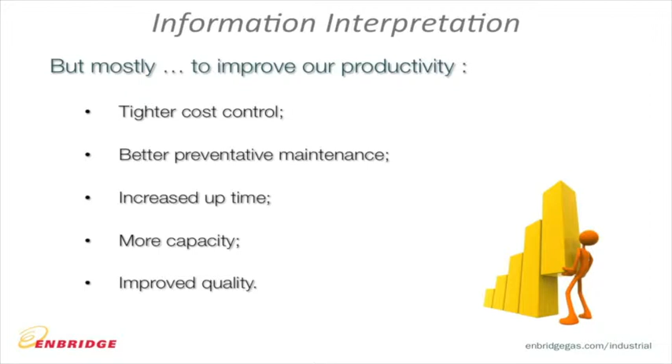But mostly what it comes down to, unfortunately, in our industrial environment, it's about good old boring improving the productivity stuff. Tighter cost controls, better preventative maintenance, increased uptime, more capacity, and ultimately improved quality.

All of those, tighter cost control, I don't have to explain to you. If you can know for your product mix how much each of those products actually uses in energy, you can price it better rather than just saying, I have this much cost over the month, I make this many widgets, I just divide them up.

Better preventative maintenance. If you have a system that tracks the gas usage or electricity usage or water usage and all of a sudden it starts climbing out of your expected range, it's time to clean that heat exchanger. You don't have to wait until something blows up and you have downtime that you didn't expect. Increased uptime, a result of those two together. More capacity. Now you don't have unexpected downtime, so you have more capacity. You can make more widgets within the same time frame.

And improved quality. I used to work in a facility where we had 12 annealing and high heat furnaces for steel. And I can tell you that I didn't care how much energy I used. It didn't matter to me as long as I made the product. But I did care if my set point started to drift off 900 and something degrees Celsius. I wanted to know that. Well, drift in the set point temperature equals drift in energy used. So if you can measure one of those, you will get better control. You will have tighter control.

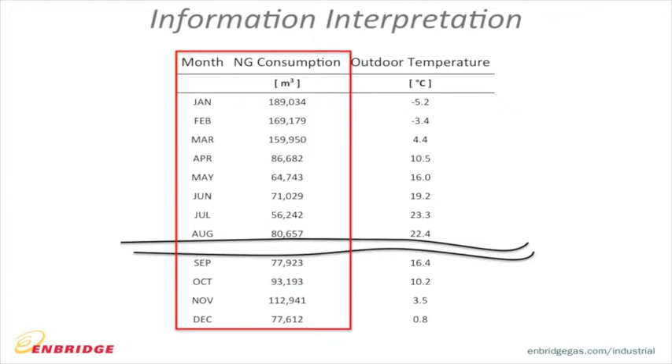Look, some examples. These are very simple examples. I just put the months. I usually look at the 3-year history, cubic meters per month, and the outdoor temperature to start with, just to give us an idea how data can be interpreted in a very simple way. So if I just take month and natural gas consumption, I get something like this. Okay. So now I know how much gas I used over the last 3 years. I know when it peaks, and if I'm really looking at it, I can say that it peaks in the wintertime, it goes down in the summertime, it's all good. Nothing special. But now I have the record of it.

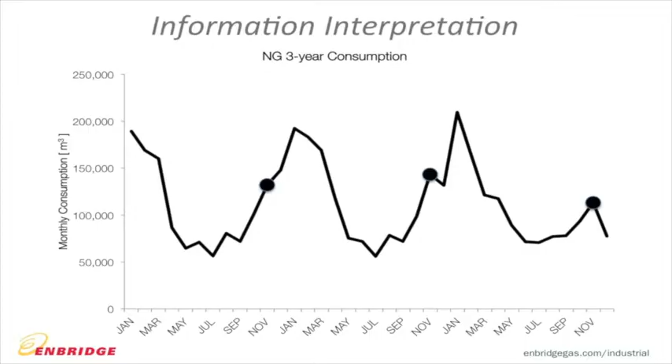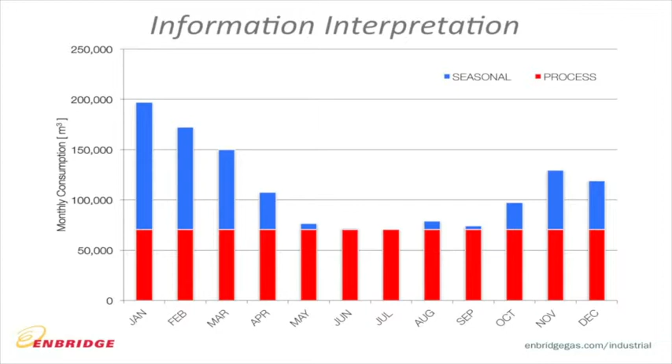A much better piece of information then is this kind of information. I take the same data, I average it over 3 years, and whatever I get in the summer usage is my process. It means it's being used no matter what the temperature outside is, which means that's my process-related usage. So that's the red one. The leftover for each individual month on top of it in blue is then seasonal usage. It means it's affected by the outdoor temperature. Mind you that usually it's space heating and ventilation, but it can be process-related as well. But it's seasonally driven. It's driven by change in outdoor temperature. So this is a much better way of looking at the data than just 3-year consumption.

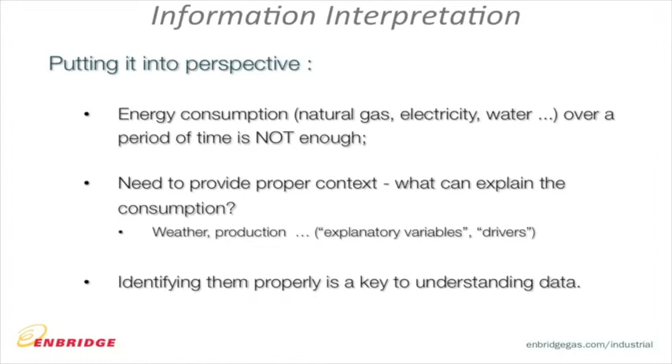So what that is teaching us is that we have to put energy consumption into perspective and into context. Energy consumption on its own won't do anything for us. You have to put it in the context of outdoor temperature, your production levels. What is it that explains that energy usage? Or are you just using energy for no particular reason? Right? There is a reason why you need energy. So you want to explain that. You have to put these explanatory variables, energy drivers, in the context of energy. And identifying those properly is the key to your data understanding. Because then you will know what you need to control your energy.

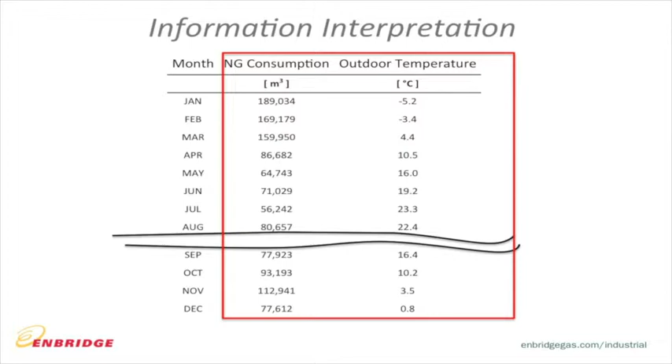So let's look at it the other way around. Let's just say natural gas consumption versus outdoor temperature now, rather than just time series. Let's just look at scatterplot data, two variables: monthly consumption on the y-axis, outdoor temperature on the x-axis. So I'm looking at this, I'm like, wow, there seems to be a break in usage.

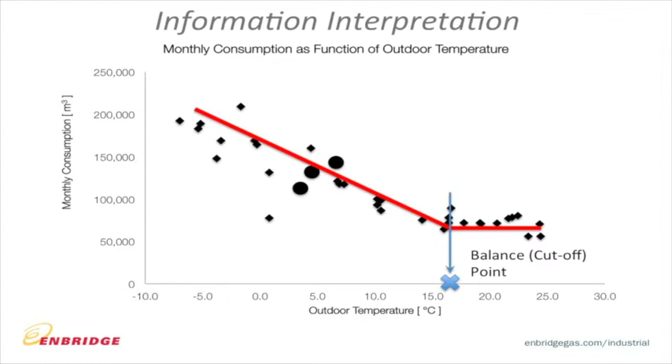And that corresponds to approximately 16 degrees. So you look at your heating and ventilation setups, and you're asking your maintenance guys, what's the setting? They will tell you, oh, it's at 21 degrees Celsius, 25, 22 degrees Celsius. Well, in reality, once it reaches 16 degrees Celsius outdoor, you don't use any heat. The unit might be on, but your heater doesn't come on.

So now this data all of a sudden becomes useful to you, because past 16 degrees, there's no variability with temperature anymore. Now you can get a feel for, oh, let me see what else we can do about it. Again, put energy into perspective. Put it in the context of what drives the energy usage.

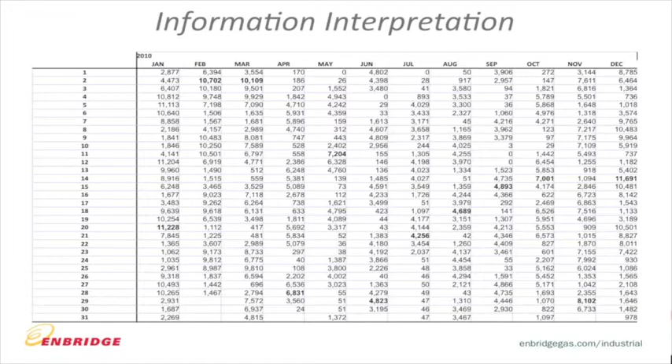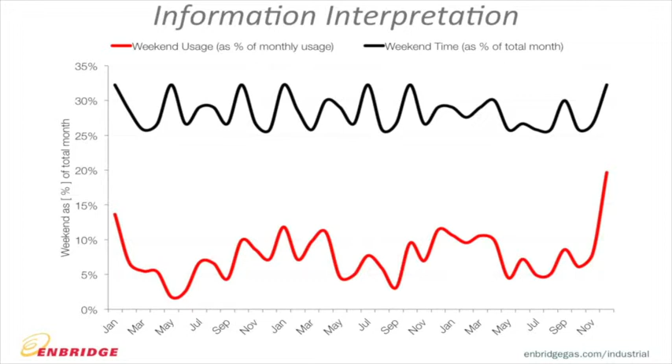Another way of looking at the data is do it day by day for all the months. Again, I usually like to do a 3-year period. I overlay the weekends on top of it. Our ESCs have the spreadsheet. We can look at your data on your request. Why would I look at that? This is my energy usage through the weekends over the 3-year period. This is how many weekends and off days we had in those 3 years.

So now all of a sudden, if I'm a 24/7 operation, I expect this line to be close to that one. I'm expecting to use the same amount of energy on the weekends. But if I'm running this 16/5, and my energy here is up there, somebody's not turning equipment off. How much cheaper does it get? Turn the equipment off and get the savings.

Not only that, you can quantify it. You can say how much energy you used, how much you should be using, subtract it. You have the business case and justification. Why would you turn this equipment off? That's how you should look at the data. Forget just the time series. Time series on its own won't do anything for you. Put it into perspective on energy drivers.

So now we'll do a brief hands-on example again of how we collect the data, just to give you an idea of what this system here can build. What we will do is we will have a little blower. It's going to generate the flow, and the meter is going to log the data that it generates. So you can have a bit of a feel of how the system actually works. Again, this is not a be-all end-all system. It's a very simple system that Jeff built for us here. But it can be applied and multiplied in the facility all you want.

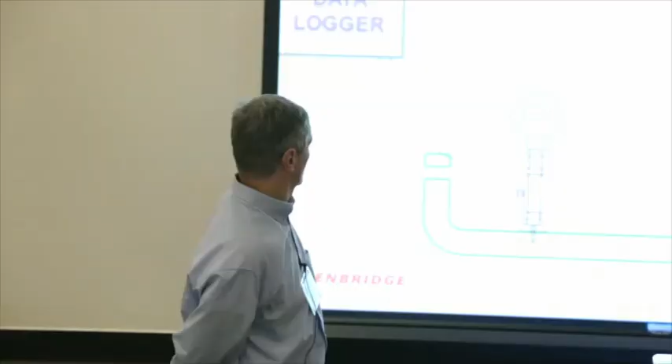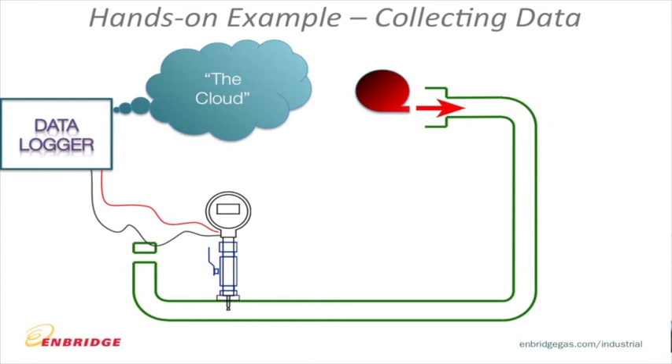So to recap, you can have a meter with a little lollipop on top, so you don't have to have a separate box. That meter will output a 4 to 20 milliamp signal to the data logger that Jeff had on the laptop there. And that can be accessed from any laptop that has Internet Explorer or Chrome or anything like that running. So there is no additional software that you need. And then, of course, everybody puts stuff in the cloud today. You can do the same thing there.

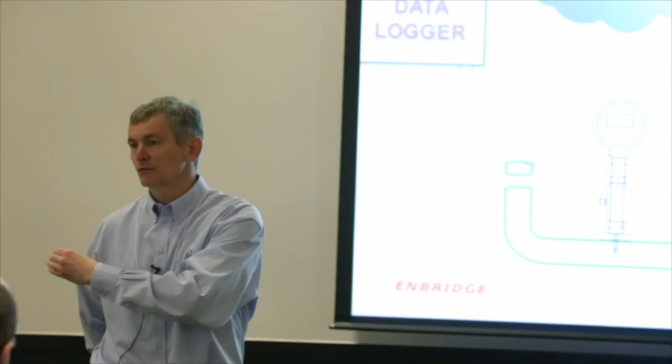Jeff had a router there because that's just the setup that worked for us. But most of you will have Ethernet connections dropping off all over the place for your PLCs, for all this stuff. All it needs is an Ethernet drop. You will probably want to have different addresses for these things, but you know all that. So this doesn't require any additional infrastructure. It's a fairly simple system that captures a lot of data for you in a very simple way.